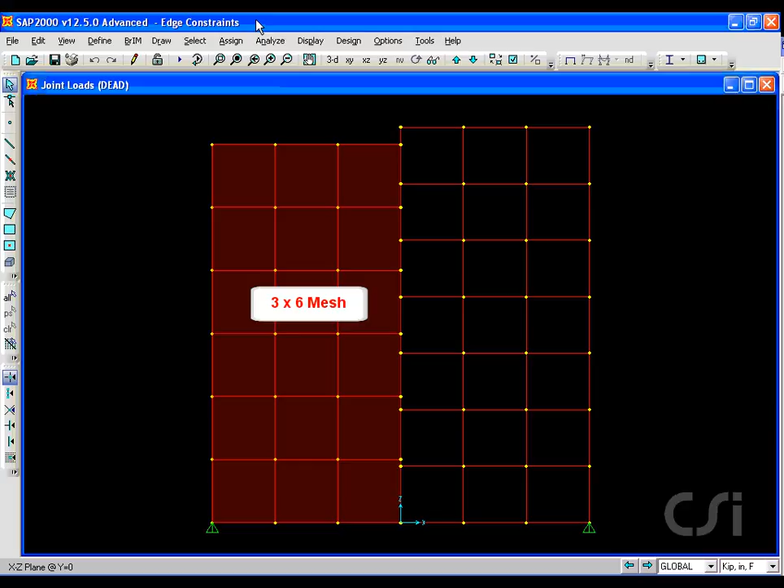One of the most powerful features in SAP 2000 is the ability to easily constrain the edges of area objects so that you need not create a transition mesh. Here, we have a single wall modeled with a mesh of 3x6 area objects on the left and a mesh of 3x7 area objects on the right. There is no continuity of the two meshes except at the bottom node. This type of mesh would traditionally cause poor results.

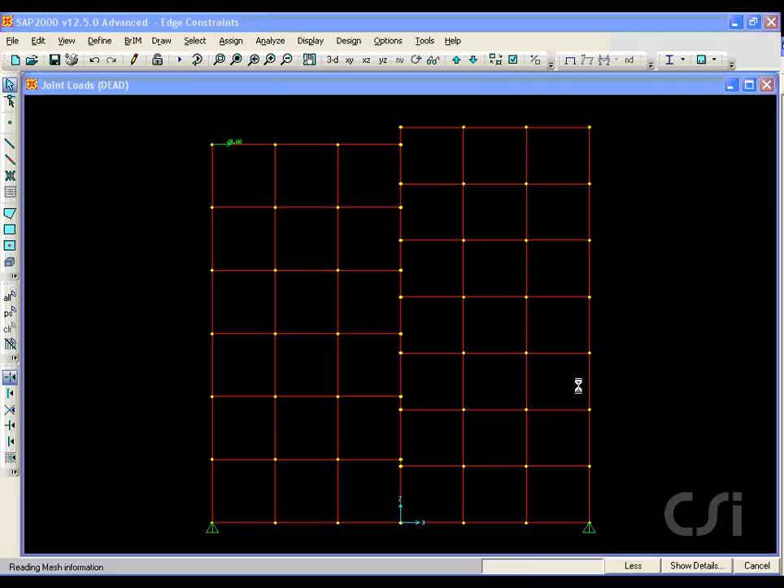We will load the wall with a single horizontal load of 10 kips. We are now ready to run the analysis. Once the analysis is complete, we see that the two halves of the wall move independently and not as a single wall.

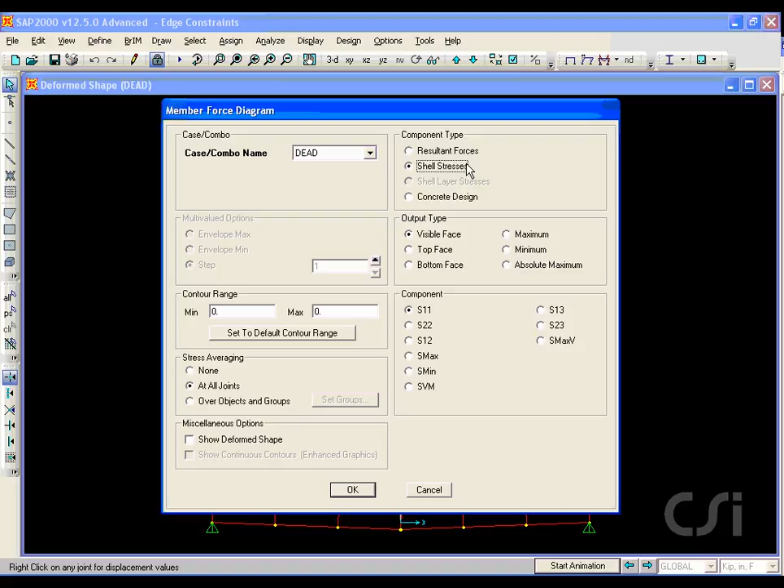The stress diagram is also not what we would expect for a continuous wall. However, with SAP 2000, it is a simple process to correct this model so that it will behave as a single wall. First, we unlock the model so that we may edit it.

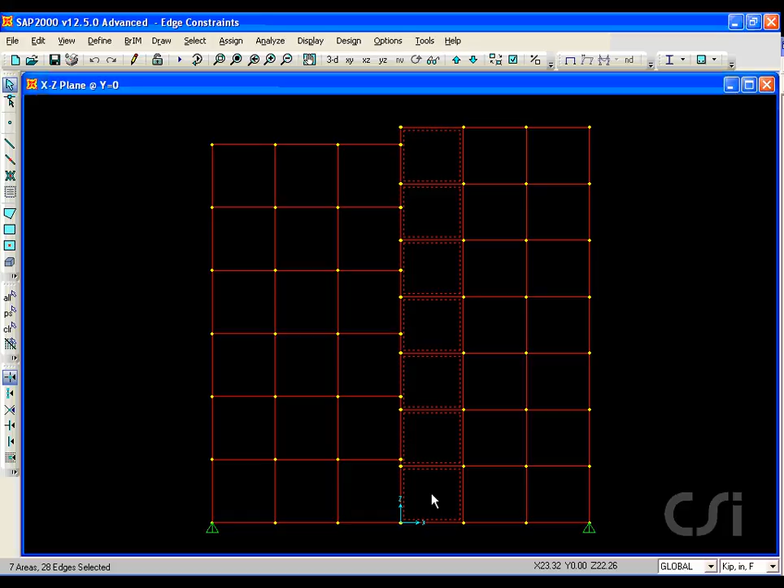Next, we select all of the area objects along one side of the line where the mesh changes and go to the Assign Area Generate Edge Constraints command and select Create Constraints around Object Edges. This will force the area objects to work as though the mesh was contiguous. Rerun the analysis.

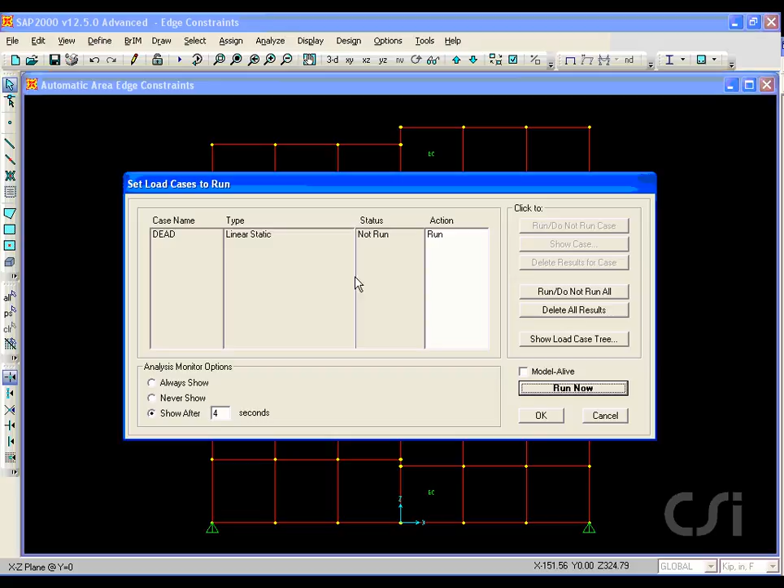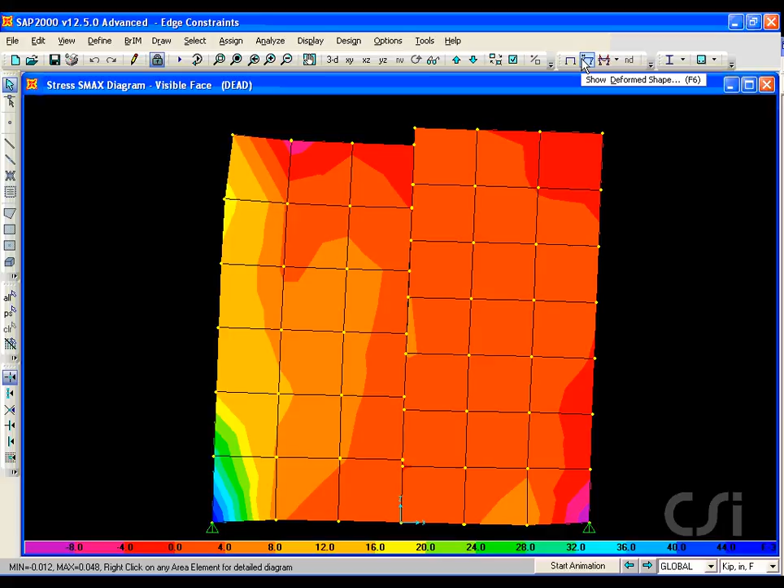And now we see that the stresses are more appropriate for a single wall and that the two halves of the wall move together. There's no separation between the two meshes. We can see the constraint of the edges better with just a deformed shape view.

Thus, by using the Edge Constraints option, we can easily tie two dissimilar area object meshes together so that no gaps will occur. This concludes this tutorial.